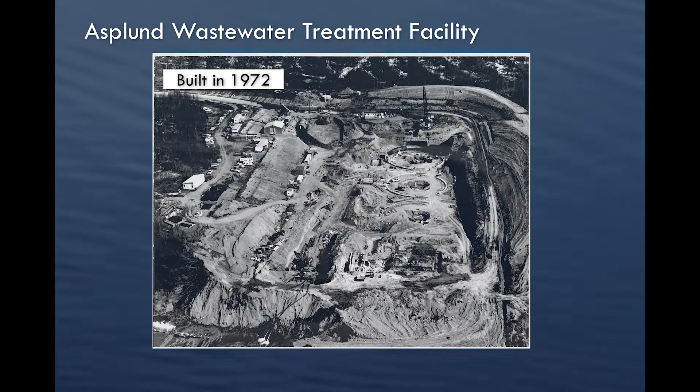Built in 1972, the Asplund facility has kept pace as wastewater treatment technology has evolved and the demands of the community have grown. It was upgraded in the mid-1980s to a 58 million gallon per day facility. On average, this facility cleans and treats approximately 30 million gallons of wastewater every day, 365 days a year.

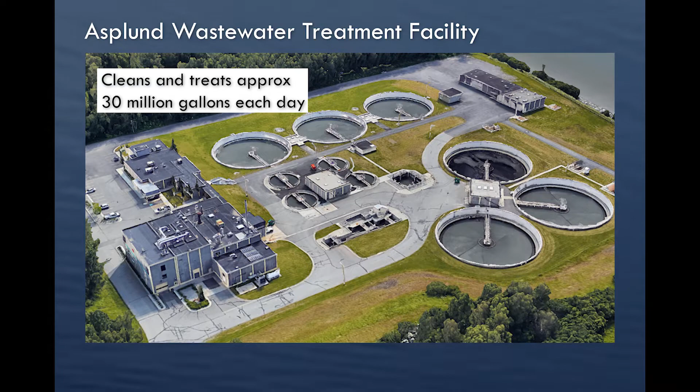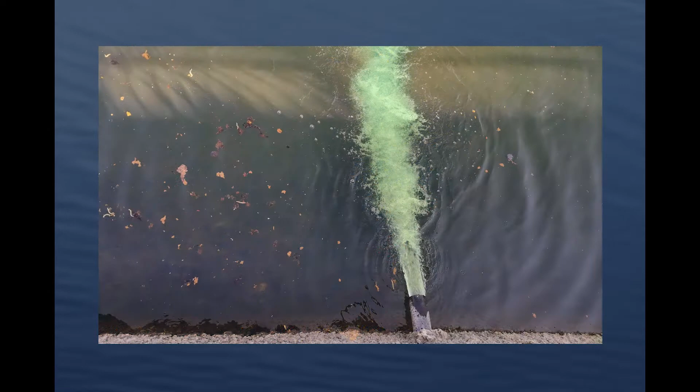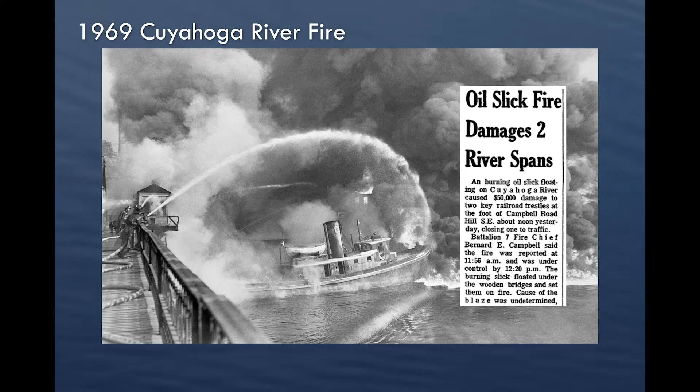Prior to the environmental regulations we know today, in the late 1960s, it was common practice to dump wastewater in moving water like rivers. In 1969, the Cuyahoga River in northeast Ohio caught on fire from the pollutants from industrial dumping and wastewater discharge. That began the push for the Clean Water Act we operate under today.

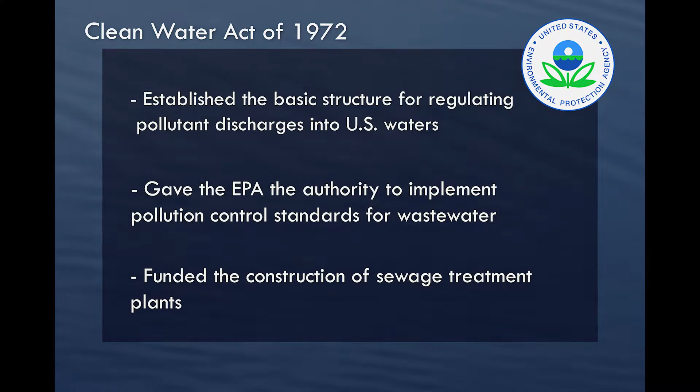John M. Asplund, former Anchorage mayor, along with city planners, fortunately were forward-thinking and pushed to have this facility built and in operation prior to the mandatory regulations in 1972.

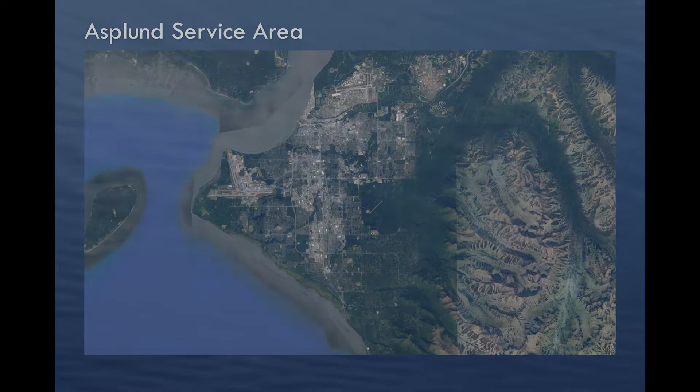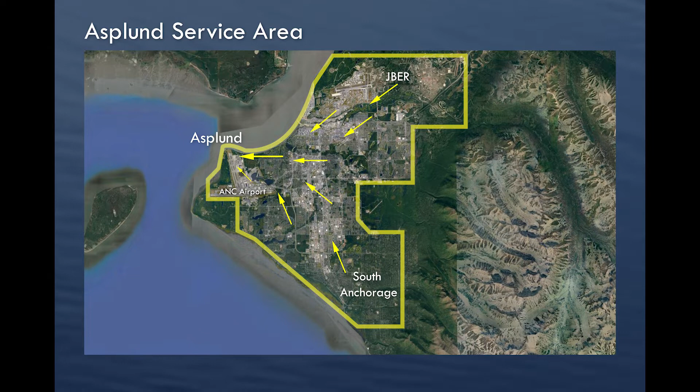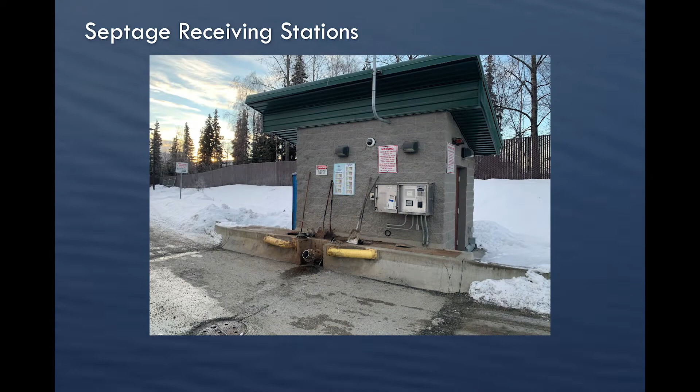All wastewater from Joint Base Elmendorf-Richardson to South Anchorage flows through a series of pipes to eventually be cleaned and treated here at Asplund. Asplund also treats waste from the Mat-Su Valley and parts of the Kenai Peninsula. Septic trucks throughout South Central Alaska empty their loads at one of AWWU's septage receiving stations. That wastewater flows through the same pipe system and is then cleaned and treated here.

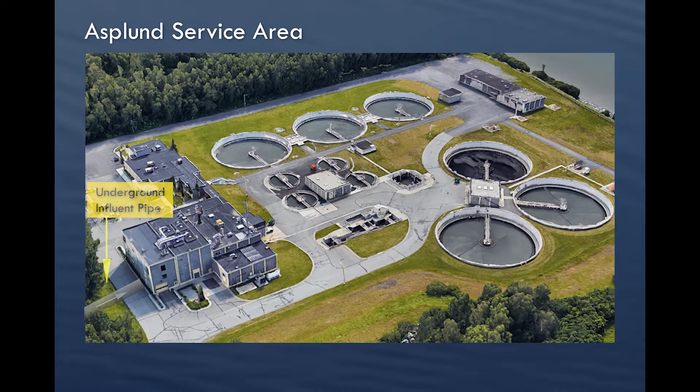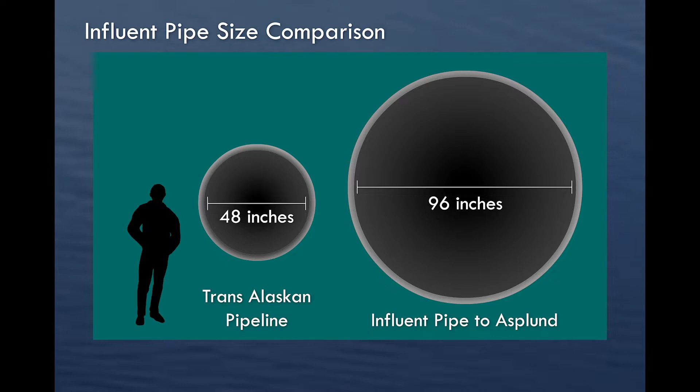The influent wastewater pipe is 96 inches. To put that into perspective, the Trans-Alaska Pipeline is a 48-inch pipe. Our influent pipe is twice the size of the Trans-Alaska Pipeline.

This is the influent wastewater as it comes into the plant. Influent wastewater is the term used to best describe all the wastewater collected in the pipes, beginning with your kitchen sink drain and your toilet flushes.

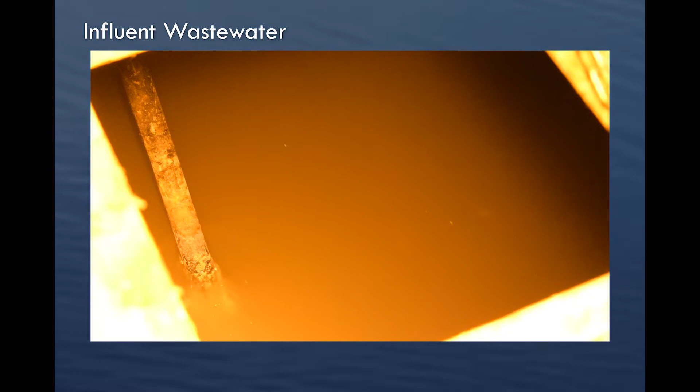This is where we pull the first samples of wastewater for testing. We are testing the BOD and the TSS. BOD stands for biochemical oxygen demand.

It represents the demand the organic waste puts on dissolved oxygen. BOD is a measure of the quantity of biodegradable organic material in the water and the amount of dissolved oxygen that must be present for microorganisms to decompose that organic matter. Dissolved oxygen, along with organic material, must be present in the water for aquatic life to survive.

Microorganisms utilize dissolved oxygen when consuming organic material.

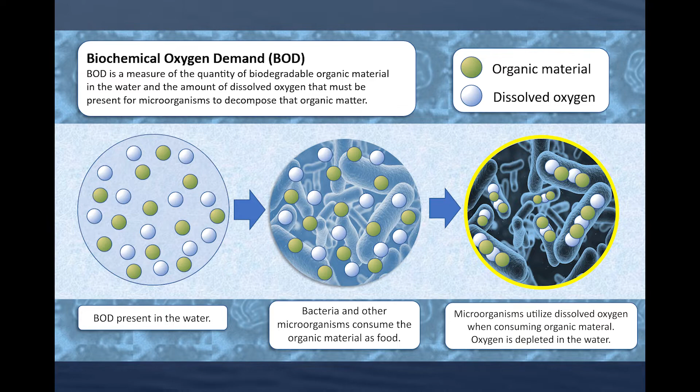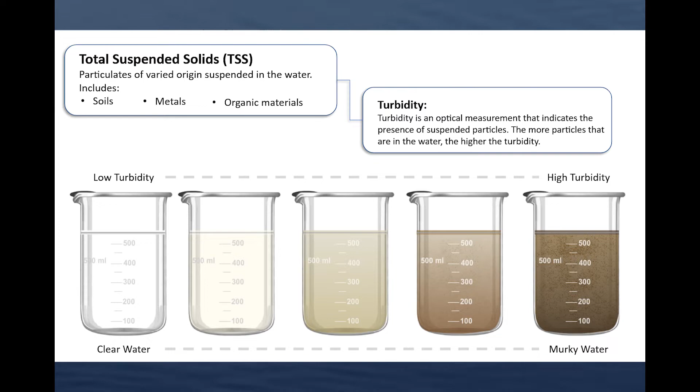TSS is total suspended solids, particulates of varied origin, including soils, metals, organic materials, and debris that is suspended in the water. Turbidity is an optical measurement that indicates the presence of suspended particles, which is a way to measure the degree of pollution in the water.

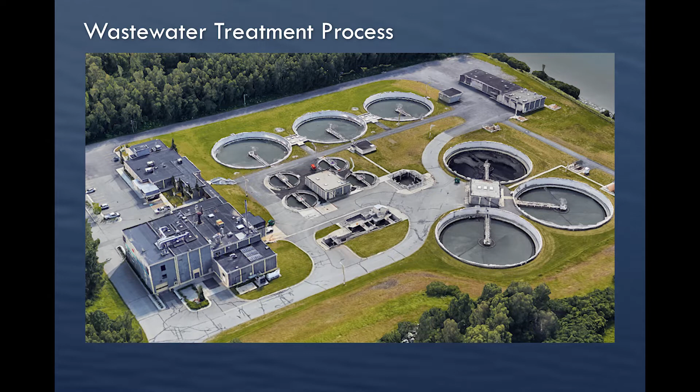We are going to go through the entire wastewater cleaning and treatment process. We will follow the water flow first and then show how we handle the solids.

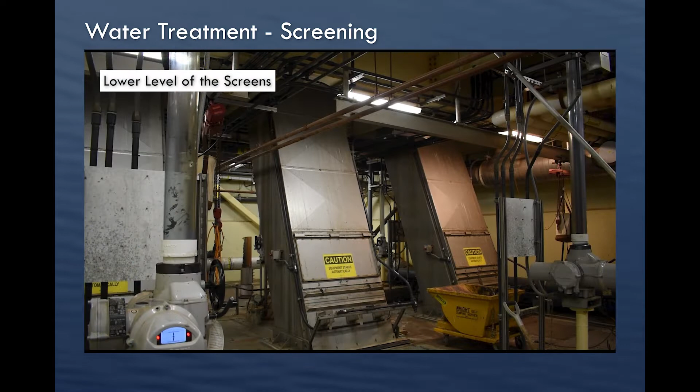First, all the influent wastewater goes through large rotating screens during a screening process. There are 3 screens, each 45 feet tall. There are only 6 of these screens in the world, and 3 of them are here at Asplund. The screens catch wipes, food particles, grit, and other solids. Anything over 6 millimeters is caught in these screens.

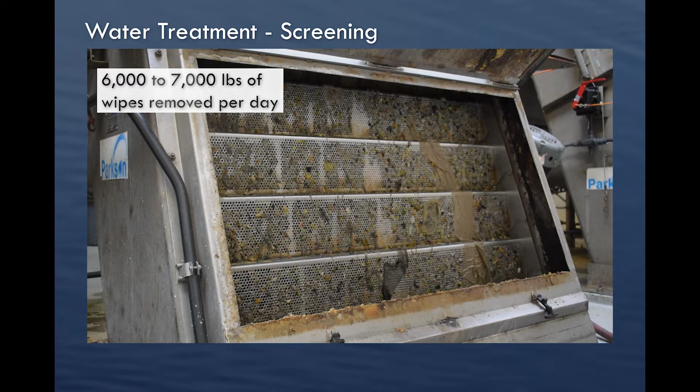Asplund removes 6,000 to 7,000 pounds of wipes per day, of which about 500 pounds are removed manually. We will talk more about handling of these solids later. Grit is sand, gravel, and other inorganic materials. Around 1,000 pounds of grit per day is removed from the wastewater.

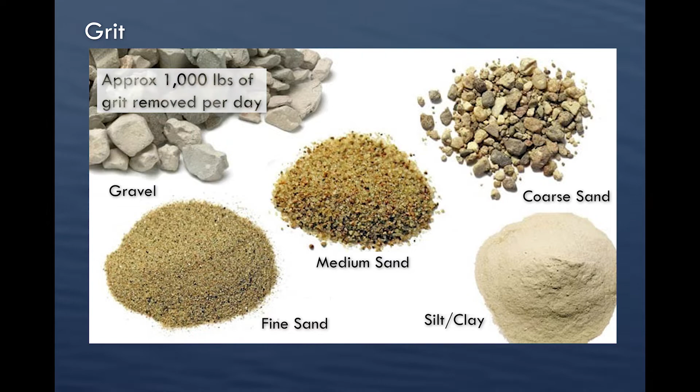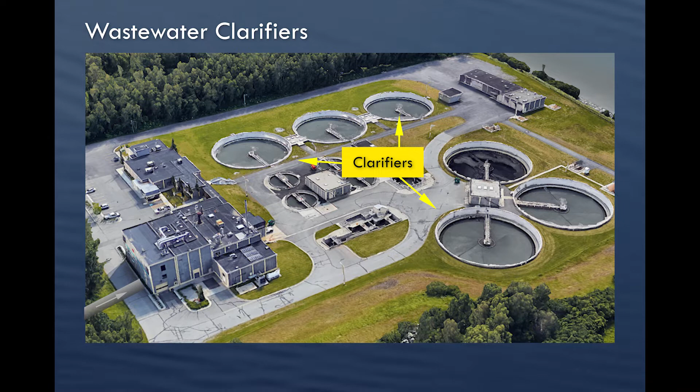Once the flow has passed through the screens and the large debris, solids, and grit have been removed, the next step in the process is the clarifiers. Originally, Asplund had 3 clarifiers, and in the 1980s, 3 more were added, doubling the capacity for the facility.

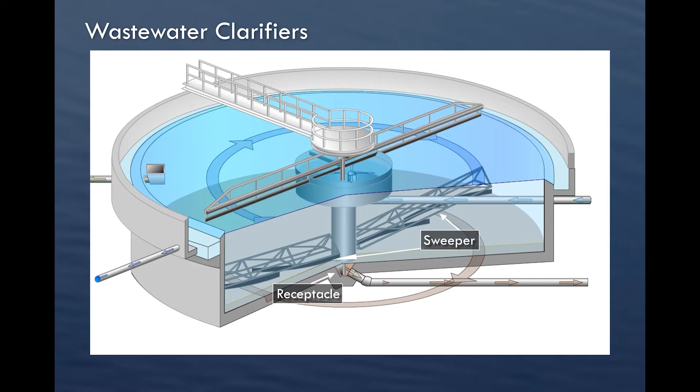The clarifier allows any solids that made it through the screens to settle to the bottom, and any fats, oils, or grease—FOG—to rise to the top. There is a scum collector on top which scrapes the FOG into a central receptacle, and there is a sweeper at the bottom that pushes any solids into a different receptacle. In the end, primarily all that is left is water.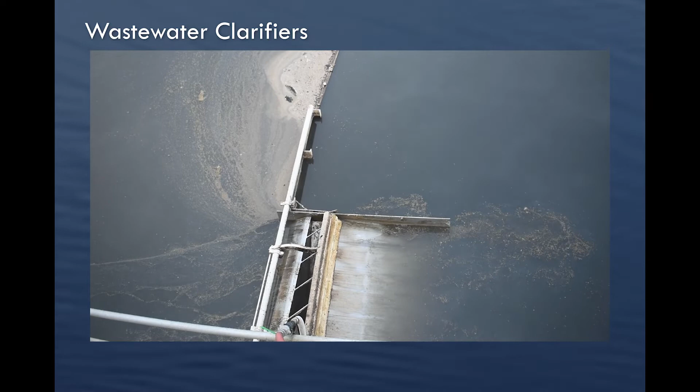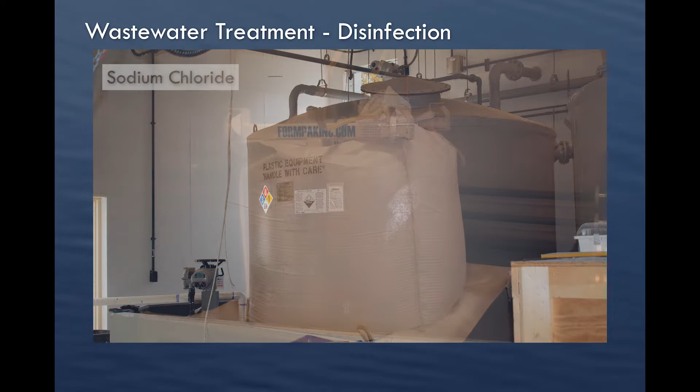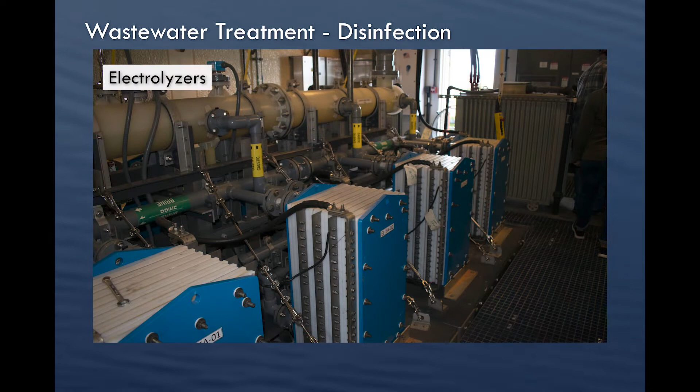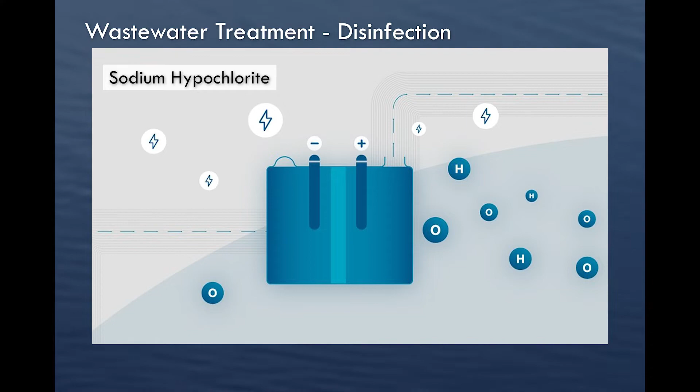Once the solids and FOG have been removed, the wastewater needs to be disinfected. We utilize lots of sodium chloride, basically salt, and very soft water to create a brine, then run that brine through the electrolyzers. The electricity pulls the chlorine from the brine, creating sodium hypochlorite, basically a super strong bleach, and that is what we use to disinfect the water.

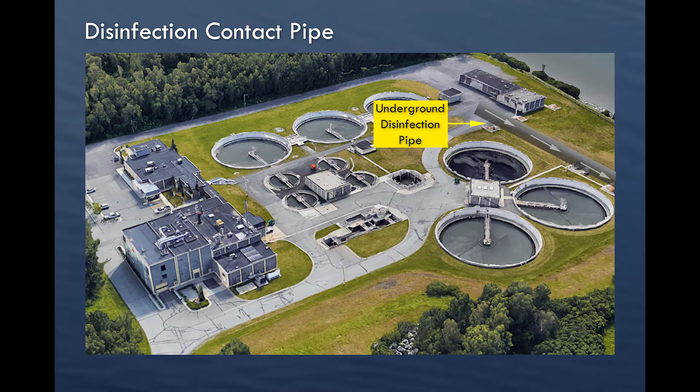Once disinfection has been added to the water, there needs to be enough contact time to make the disinfection most effective. That contact time is achieved by having the cleaned and treated wastewater enter a pipe that spans roughly half a mile. The half-mile long contact pipe is 120 inches, that's 10 feet. You could drive a car through this disinfection contact pipe.

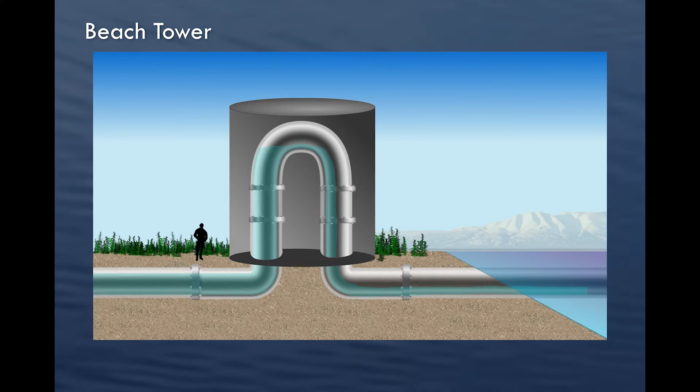After the water has been disinfected and flowed through the half-mile long, 120-inch pipe, it goes through a reverse P-trap system at the beach tower. This helps maintain proper contact time for optimum disinfection prior to the water going back into the environment.

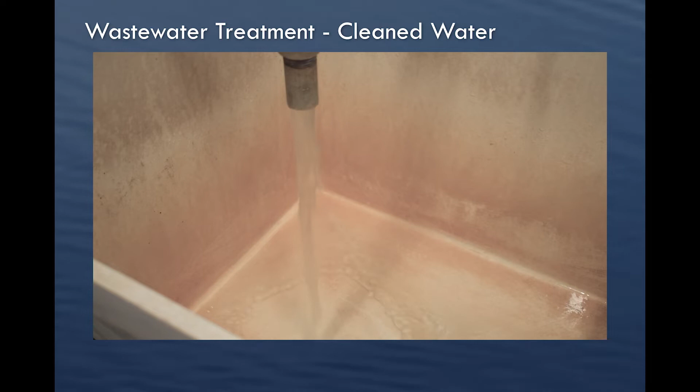When the wastewater enters the facility, before it goes through the screens, samples are pulled for testing. After the entire cleaning and treating process happens, samples are pulled again for testing to be sure we've removed the required level of pollutants. The requirements for our permit are removal of 30% of BOD and TSS. However, Asplund cleans and treats up to 45% removal of BOD and over 75% removal of TSS.

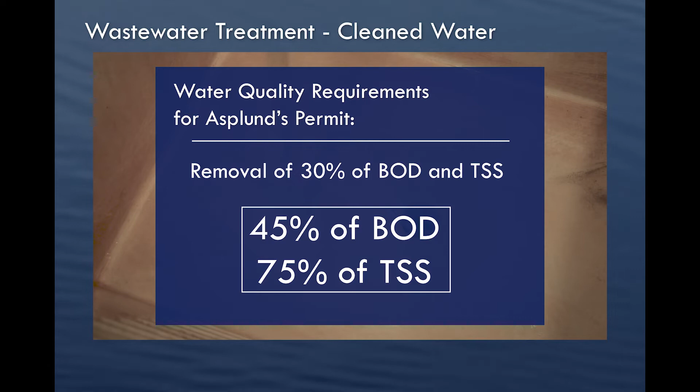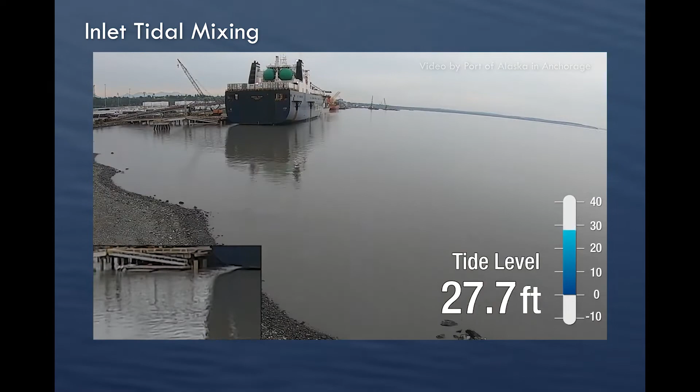This is what the water looks like before it is released into Cook Inlet. Anchorage is home to the highest tides in the United States, which makes for an optimum mixing zone once the cleaned and treated water is returned to the environment. There has been no evidence of the discharge having an impact on the environment.

So what do we do with the solids we removed from the water? Now we will explore that process. Let's go back to the screens we spoke about in the beginning.

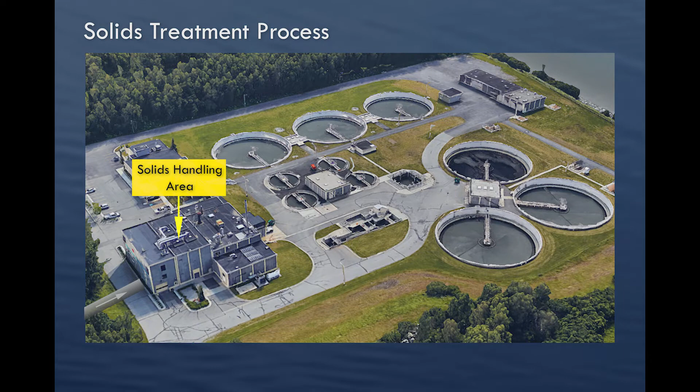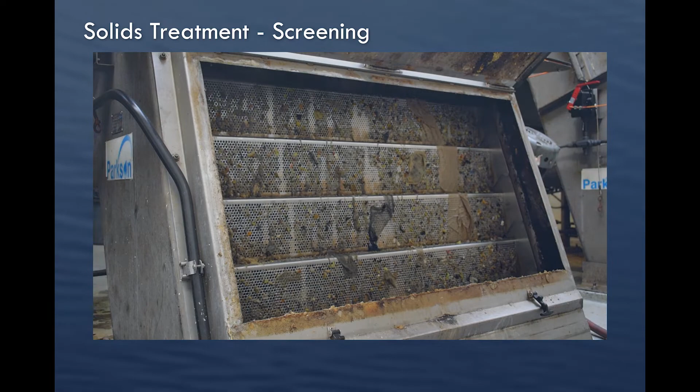The 45-foot tall rotating screens catch wipes and other solids. Once the screens reach the top, a brush cleans off the debris that eventually goes to the landfill.

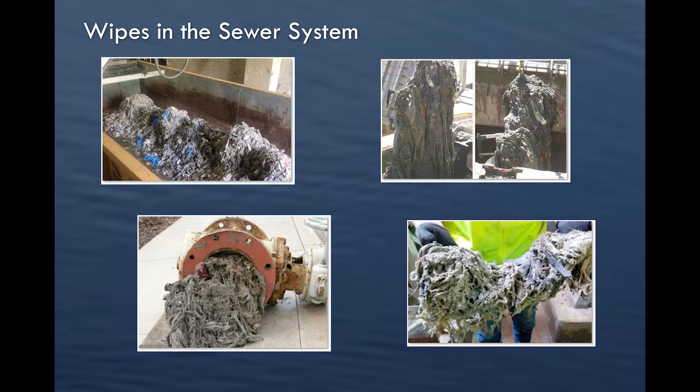This is what wipes look like in the sewer system. They don't break down and dissolve like toilet paper, and they cause havoc in the system. Please don't flush any wipes, even if they say flushable.

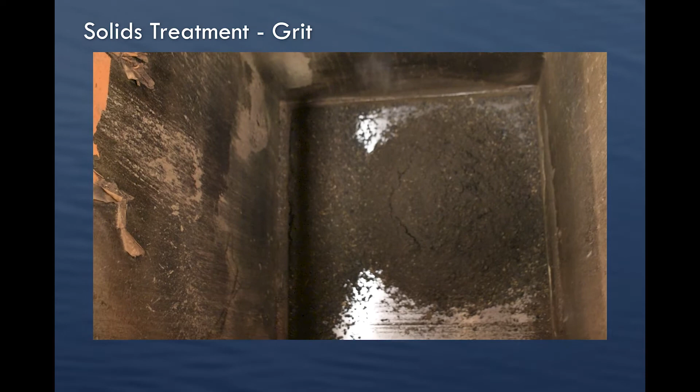Just throw them away. The grit travels through a conveyor system and is dumped into a waiting dump truck. The solids collected during the clarification process are pumped back to the main plant to begin the dewatering process.

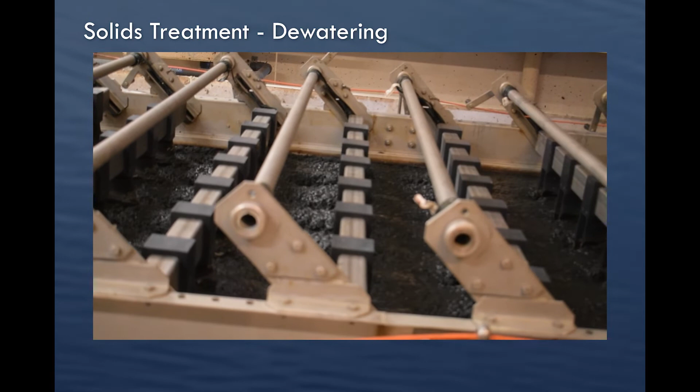This shows the biosolids which were removed during the clarifier process. They are squeezed to dewater. The goal is to remove as much of the water from these solids as possible before putting the solids into the incinerator.

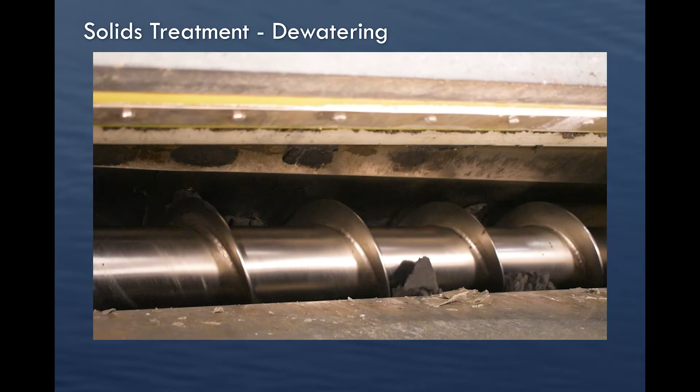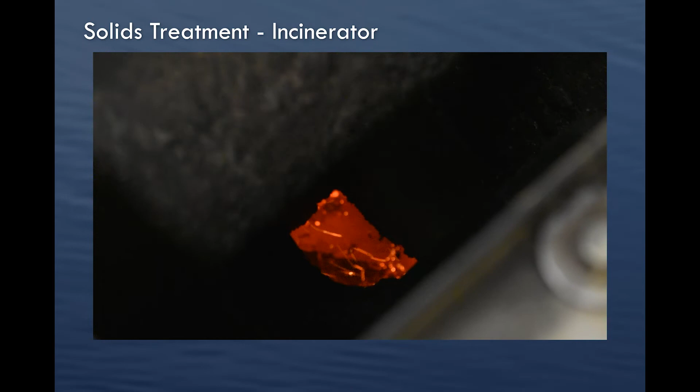The biosolids are fed into the incinerator. Temperatures within some of the hearths of the incinerator can be as high as 1,500 degrees.

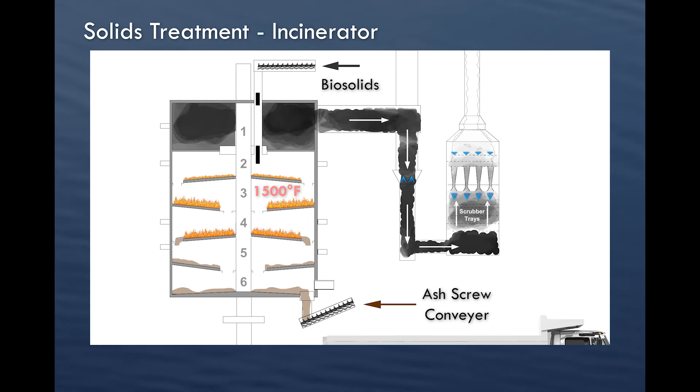We are able to take 65 tons per day of biosolids and burn them down to about 5 tons, less than a dump truck full.

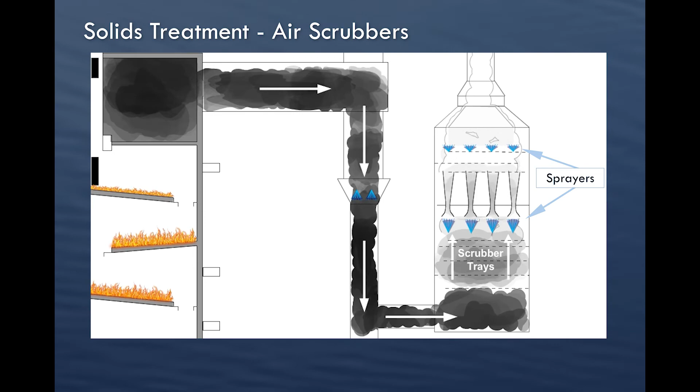Anchorage Water and Wastewater Utility not only follows the Clean Water Act rules, we also abide by the Clean Air Act rules. All smoke from the incinerator goes through scrubbers to clean the air and sprayers to cool the air. This process keeps any emissions from the incinerator clean, and unless the outside temperature is extremely cold, you'll never see a plume.

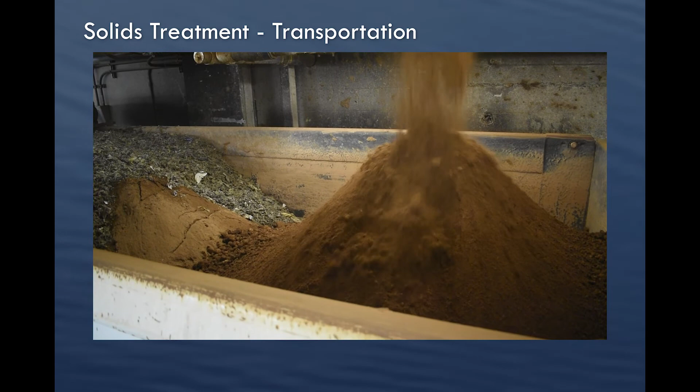The grit, wipes, and ash are all loaded into the same dump truck and end up at the landfill. This shows the wipes, then the grit, and finally the ash being dumped into the truck bed. If we didn't utilize the incinerator, we would have over 8 dump trucks a day taking waste to the landfill. On average, we currently send just 1 dump truck per day to the landfill.

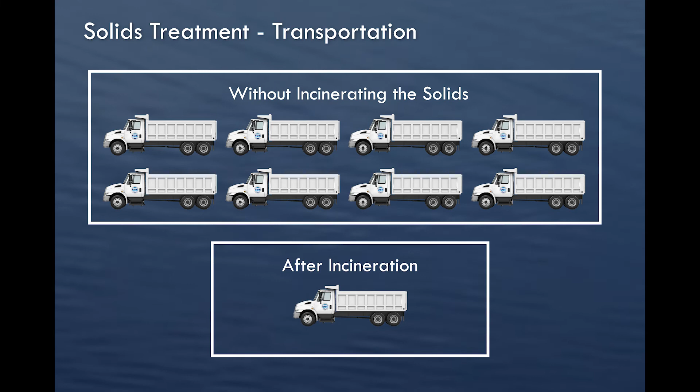This dump truck is the final step of the solids handling.

We hope you've enjoyed this virtual tour of the John M. Asplund Water Pollution Control Facility. And remember, flush only pee, poo, and toilet paper. AWWU keeps water flowing and wastewater going 24/7, 365.